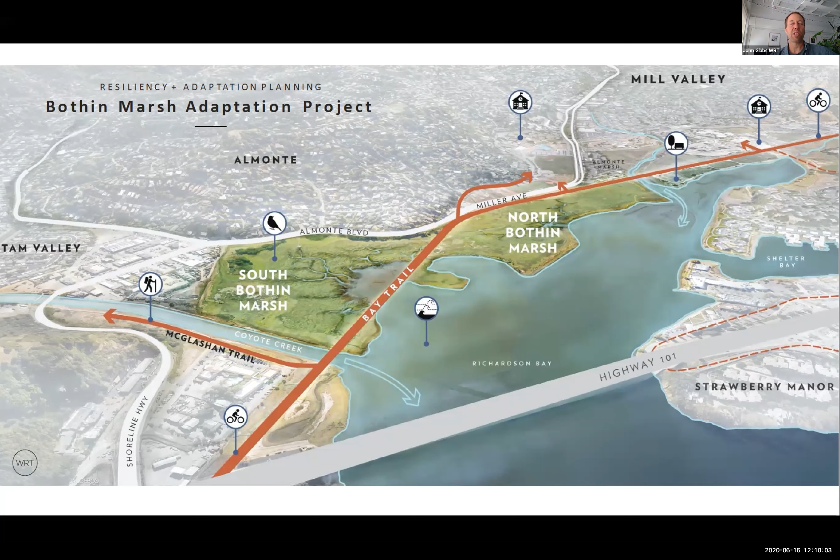So right in there becomes this really important story of how do you save a marsh? How do you understand the co-benefits between this levee as a protection of the marsh related to southern storm wave fetch and the erosive effects of waves into the marsh, but also recognize that the lack of tidal influence in and out of this marsh, the reduced tidal prism, is another effect, a negative effect of the Bay Trail and that existing levee. So looking more specifically at the height of that trail, we see a resilience goal of mid-century, which is mid-century sea level rise plus 100-year storm flood. It's about 5 feet of additional elevation that trail would need to be raised in order to mitigate that effect.

And we're right at the point now in our process, as we're really midway, where we're starting to see some co-benefits. We're starting to see the ideas of a raised embankment of ecotone slope, and looking at the level of investment that it would take to achieve that, both through permitting as well as through the dollars and cents and the cost, and what measure of resilience we would have as we were trying to protect the marsh. But of course, we looked beyond that to end of century, and we see even a 5-foot elevation gain in the height of the trail would still not be resilient to end of century. And so we're also looking at elevated bridge structures.

We're looking at rerouting the trail, and the broader effects of sea level rise as you look out into that time horizon. So really interesting process for where we are today and where we're going to be going. The engagement has been really interesting, and just huge credit to the client group who's done really all the legwork associated with the engagement, the number of tours, the number of students, folks from Marin City, folks from across Marin County that have come out to learn about the ecology of the marsh.

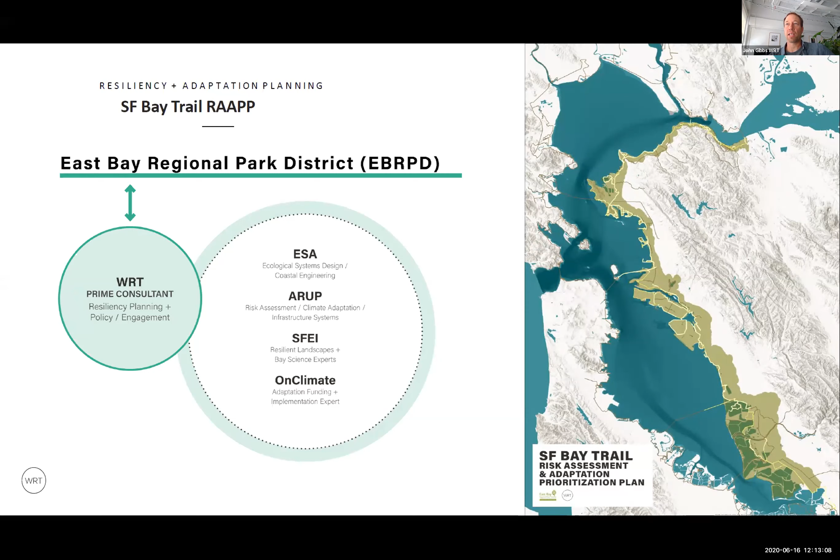So one of the stories about this project is you have over 40 miles of shoreline, you have 2 counties, multiple cities, and a lot of additional miles just of trails along this corridor. So how does East Bay Regional Park District prioritize where it should be directing the greatest resources to protection? And so therein really becomes our project. We have a fixed budget. We've got to cover a lot of territory, and we need to deliver a number of succinct priorities.

So leveraging the OLUs from SFEI, the additional work of adapting to rising tides, leveraging that work becomes really important for being able to move projects along efficiently in our San Francisco Bay Area. And there's a great body of work that is out there. Maybe there'll be a few comments and questions later about some of the gaps in that as we've begun to look at the varied conditions.

So with all that acreage and mileage, how do we really bring this process through in a succinct way? So we began with an analysis of the full shoreline, and I'll click through some of that research very quickly. We then moved into a risk assessment, narrowing down the priority segments to do additional work on, and ultimately developing a list of about 3 specific projects that really represent the highest priority to East Bay Regional Park District. We began with very high-level guidance across all of those trail segments.

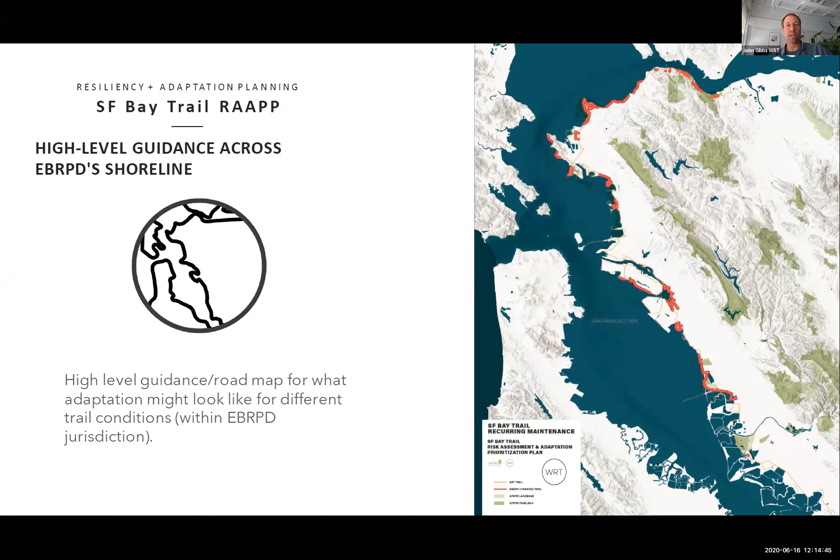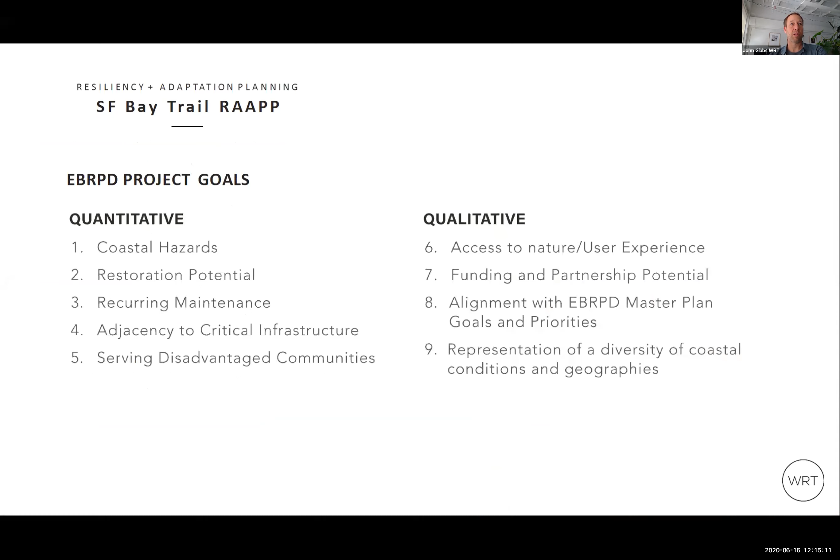We developed a set of goals that were both quantitative and, importantly, were qualitative. We have an incredible brain trust on the team as well as within the client group. So we looked very specifically at hazards and restoration potential. We looked at maintenance. We understood the disadvantaged communities that both rely on the trail for transportation, but also rely on the trail for public access and access to public health benefits of these areas.

We mapped pretty extensively in a number of different ways, and this data set was looking very specifically at both tidal inundation from storm and tides and sea level rise, but also adding the data set from UC Berkeley and others related to groundwater. So mapping this, we began to see impacts to trails, but as you can also imagine, we began to see lots of other impacts all along the East Bay shoreline.

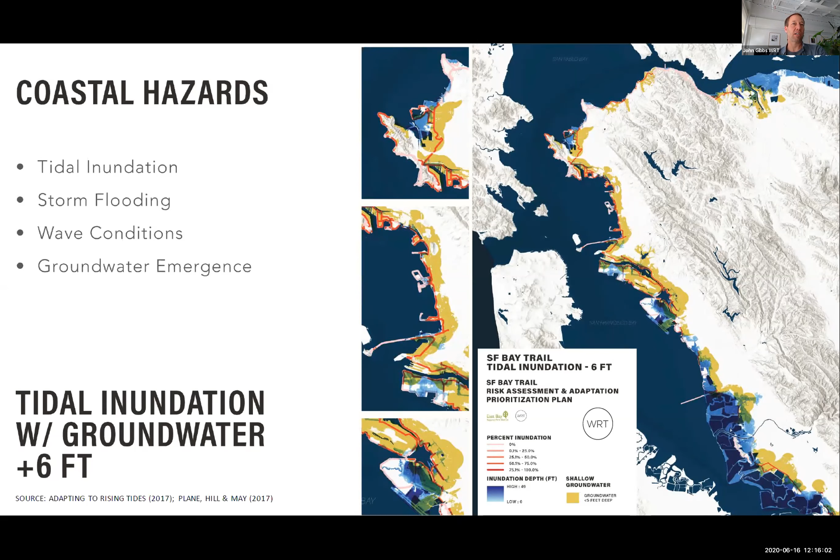And we have a client that is a parks department. And I think that one of the things that this project raises is, you know, there's lots of impacts and it's going to take a lot of different partners. East Bay Regional Park District can't go this alone. And that starts to come out through some of the partnerships and strategies that Alexis Robert has been helping us with as we move into more site-specific projects. We looked at the restoration potential. So we looked at nature-based adaptation strategies in addition to just simply a trail.

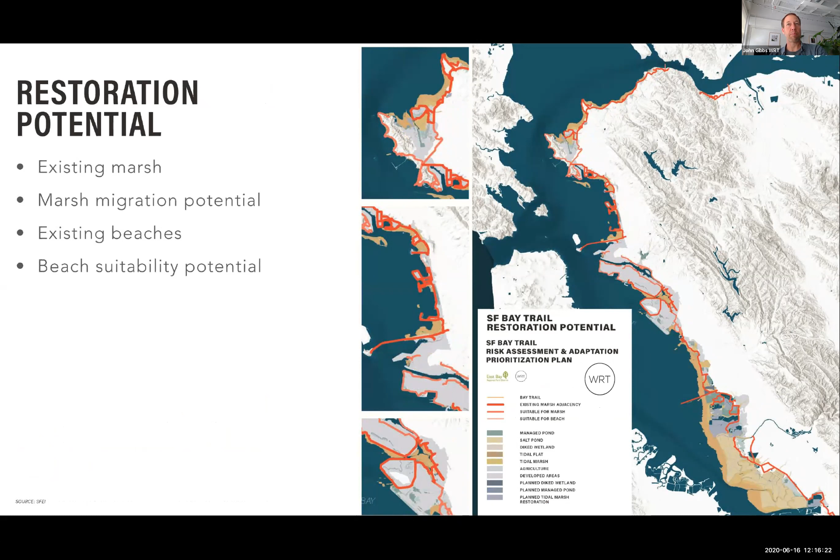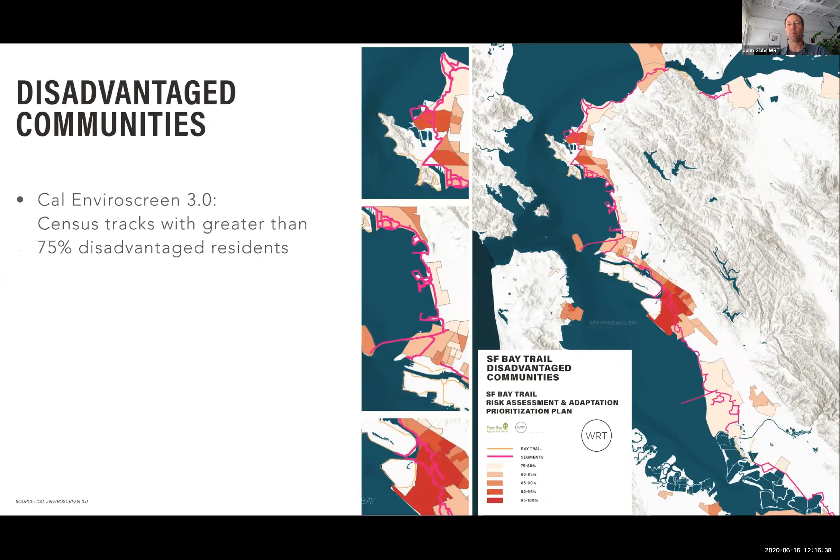We weren't interested simply in armoring and protecting things in place, but looking at where there was adaptive and nature-based solutions. Where do we have ongoing maintenance issues, so very near-term concerns, critical infrastructure. We looked very specifically at disadvantaged communities all along the East Bay shoreline and how that began to weigh in and factor into priority segments of the project.

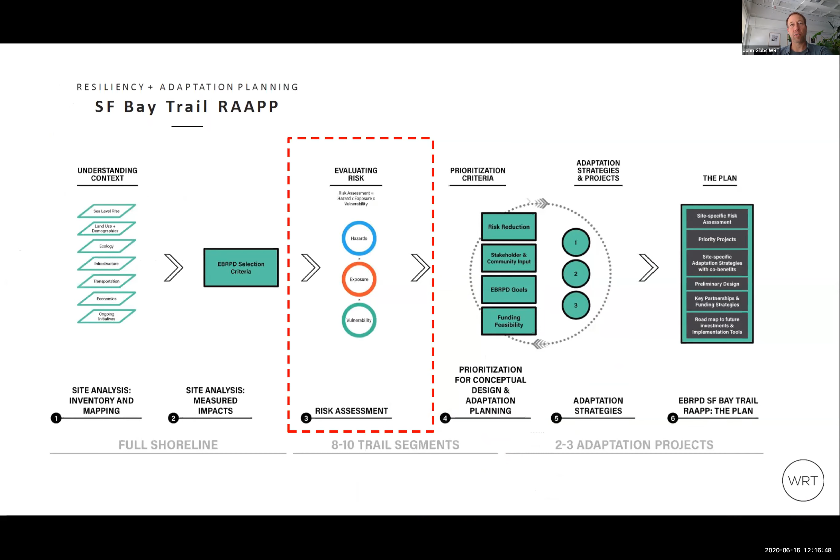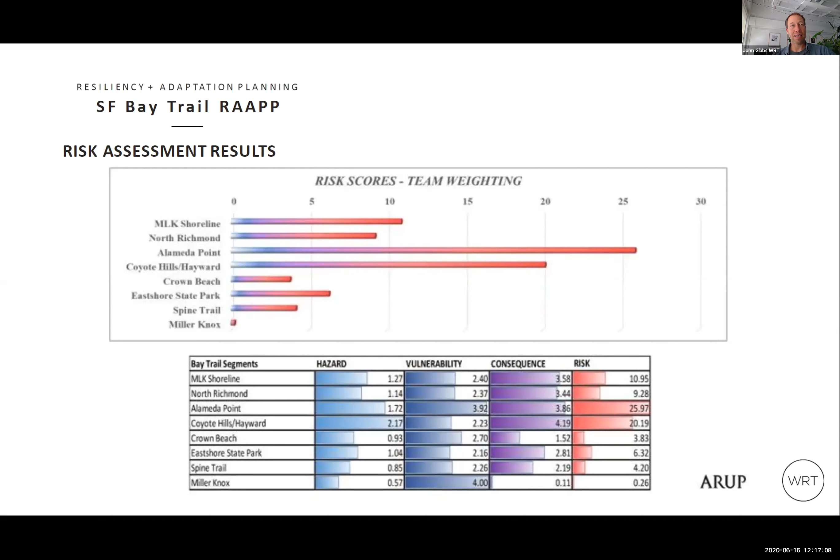Jack Hogan from Arup did just a terrific job with his team looking at the risk assessment, and they led a very specific process on the 8 sites that we had narrowed it down to. They moved through a very technical process looking at a whole series of coefficients related to hazards, vulnerability, consequence, and ultimately a compilation of risk assessment. We took that data forward into a series of priority sites. So the MLK Shoreline, Alameda Point, Coyote Hills, and in Hayward, those were really the top projects.

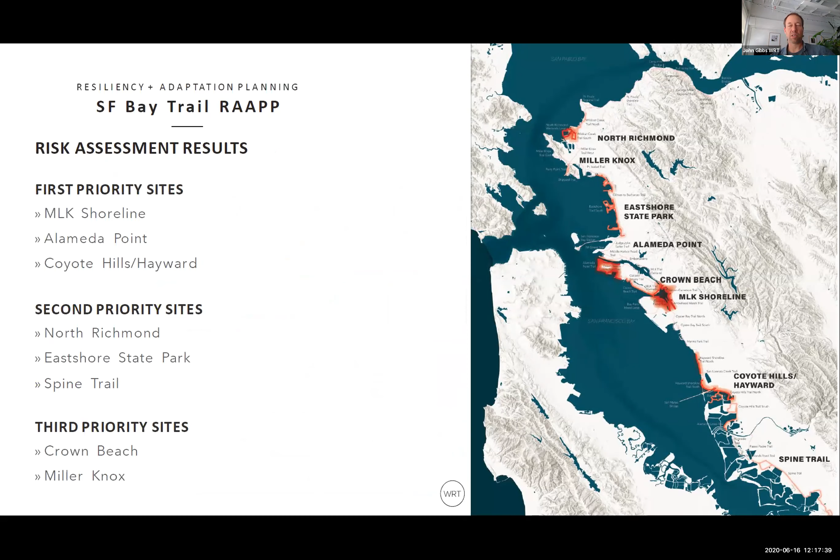Interestingly, Gena is going to be speaking next about the Hayward shoreline. And last week, we heard from friends at Methuen talking about North Richmond. So there's actually a lot of nice overlap and support that this rigorous analysis lends to work that's already been done. Ultimately, we're going to be moving forward with specific concepts for specific sites, and importantly, looking at the partnerships,

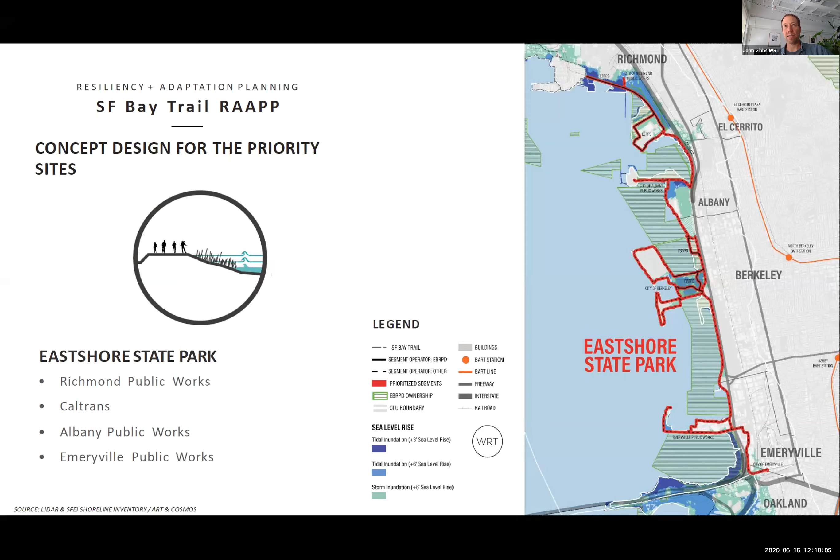because again, this is not about East Bay Regional Park District going it alone, but how do they join forces with the other assets, whether it's Port of Oakland, or the city of Alameda, or in the case of Eastshore State Park, adjacent cities, communities, the state of California, and certainly within the MLK shoreline, we're right adjacent to the airport in addition to the city of Alameda. And that wraps up my summary of those projects, and I want to hand it over to Gena.

Great. Thank you, John. I'm just going to bring up my screen here, so hopefully this transitions seamlessly. Perfect. You guys see full screen? Great. So thanks so much.

That was a really, I think, helpful and very contextualizing presentation, John, and I'm excited to share some related work. I was hoping to share today some of the work that we developed for the Resilient by Design competition and some of the spin-off projects that have really evolved from that.

I also just wanted to share a little bit about SCAPE. I put this nostalgic photo of our office in here to show a little bit of who we are. We're about a 50-person design firm located in New York and New Orleans. We're no longer working in the office. We're working from home, but adapting along with the changing world. And we're composed of a mix of landscape architects, urban designers, planners, and horticulturalists, all working in a very interdisciplinary way to think about climate change impacts on society and landscapes.

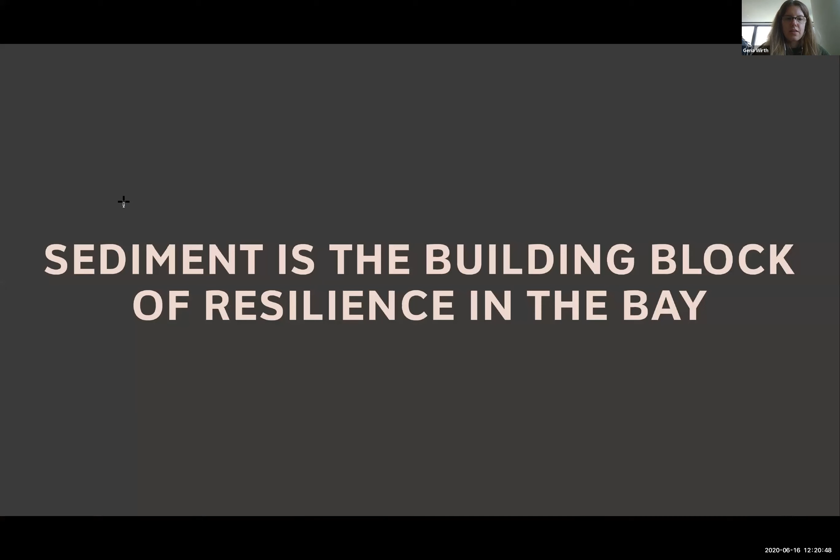And many different scientific practitioners in the Bay Area are really looking at this issue of sediment supply. John, you mentioned it, and I think everyone working in the Bay Area on issues of marsh and tidal wetland restoration understands that sediment supply is one important piece of that equation. And that's really because sediment helps build baylands as sea levels rise.

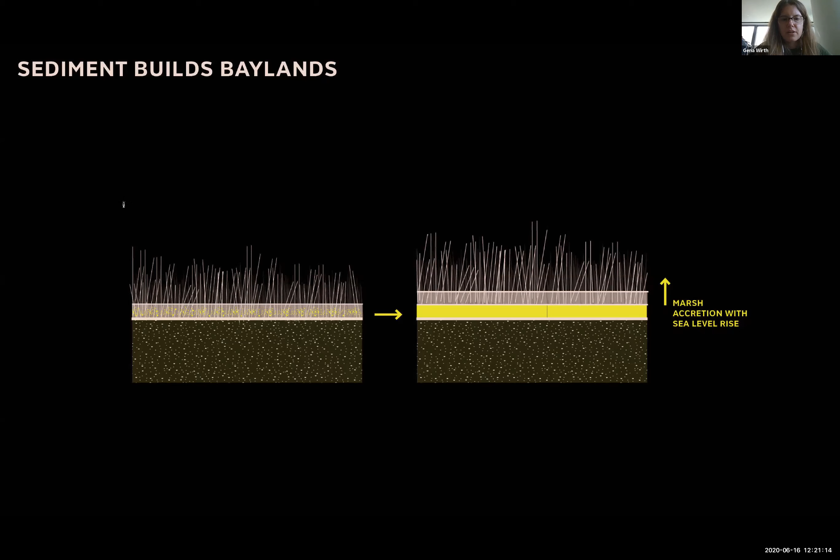Marshes and mudflats and other intertidal ecosystems also need to keep pace with that changing water level so they don't drown or transition to other ecosystem types. And a sediment supply coming in from rivers or streams or tributaries often helps supply that critical sediment to help those marshes grow over time.

Historically, our sediment conditions have really changed from what they once were. Tributaries and the San Joaquin and Sacramento rivers really provided large sediment inputs to the bay. But over time, dams and flood control channels have trapped and contained sediment, basically divorcing the flow of sediment from the flow of water in the Bay Area.

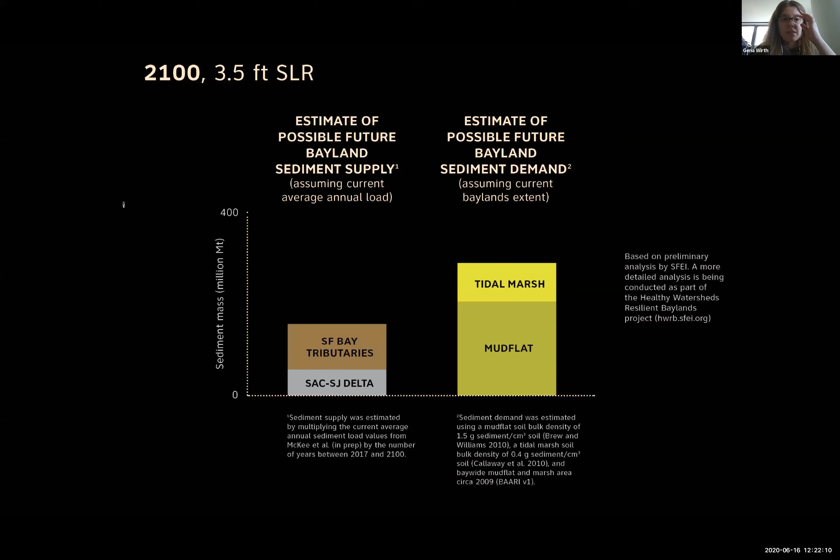Regionally, this is probably an out-of-date graphic because in the last year or so there's been a lot of additional research on this issue, still conveying similar trends: the sediment provided today by the Sacramento and San Joaquin river deltas and local tributaries of the bay does not provide enough sediment to meet the future potential need to maintain even the existing tidal marshes and mudflats the bay has today, using this time frame of a 2100, 3.5 foot sea level rise scenario.

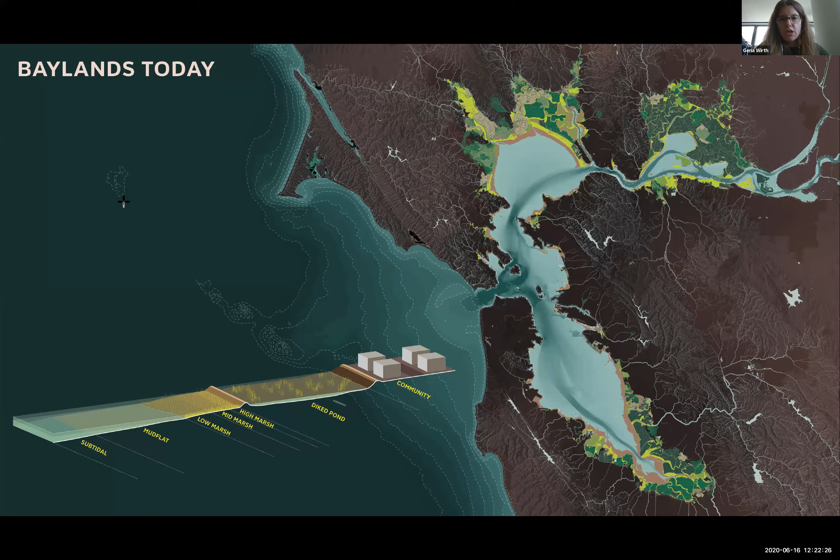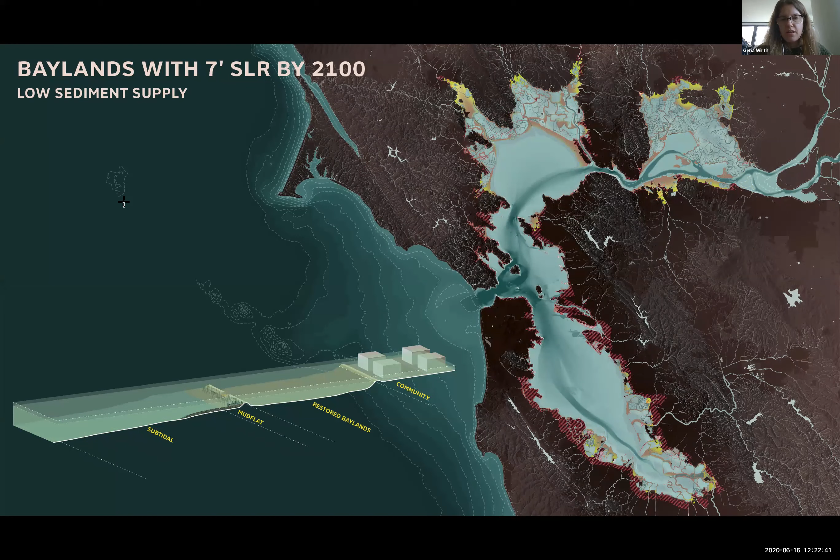Our team tried to use that existing research and build on it, visualizing how this could trigger transformative regional scale bayland ecological and social change. Thinking about this mosaic of ecosystems that lines the bay, and how it might transform into a system predominantly composed of mudflats or subtidal ecosystems and flooded communities over time, with this loss of or transformation in ecological composition caused by sea level rise.

Our team really decided to take sediment as a design challenge, and think about how we can design with mud, but also how to make this issue of sediment management and supply a much more public and debated issue, because sediment is often thought of as a waste product, not necessarily as a life-giving or ecosystem-building material, particularly to members of the general public. So this was one of our project goals.

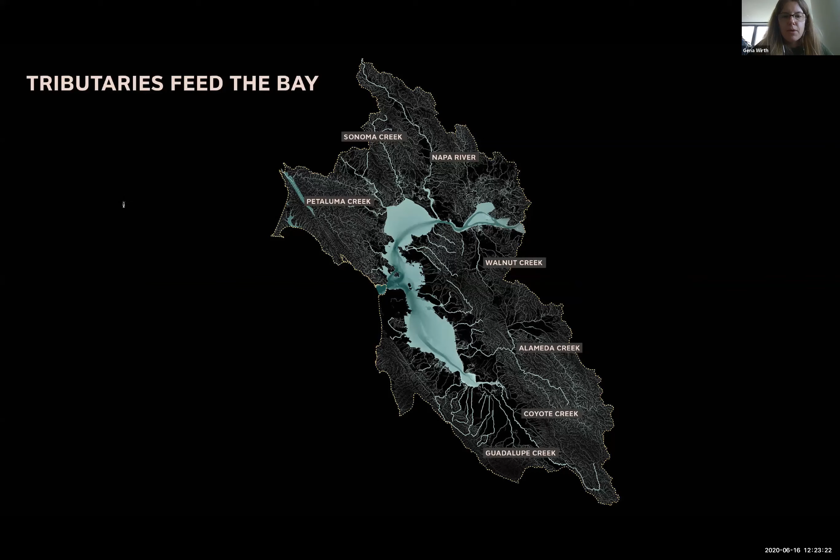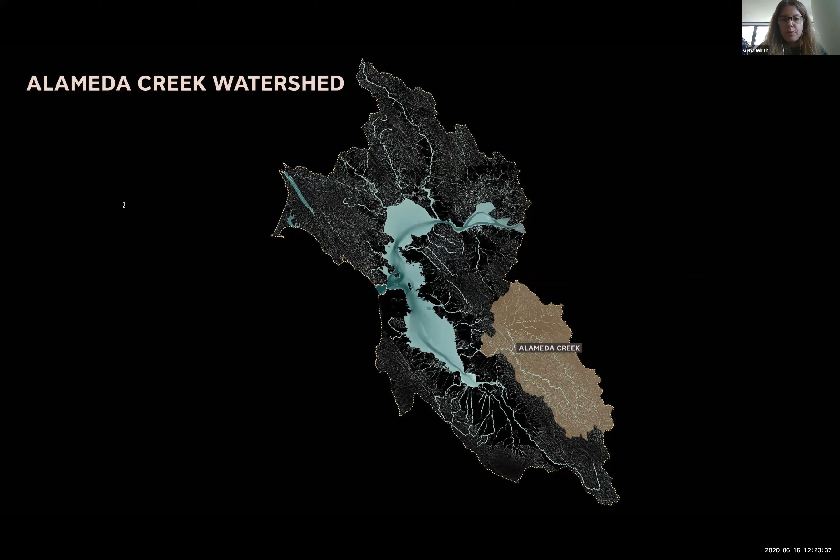Rather than focusing purely on the edge, where many sea level rise and adaptation projects focus because those impacts might be most apparent, we decided to look upstream to the different tributaries that fed the bay, and focus on Alameda Creek, understanding the historical connection between Alameda Creek and its sediment shed and the bay itself, what the connection is today, and what can be done to improve that situation.

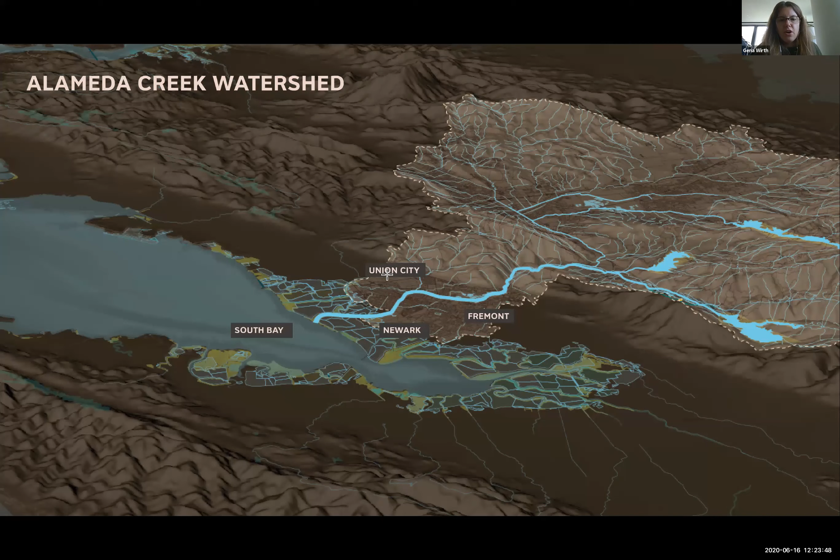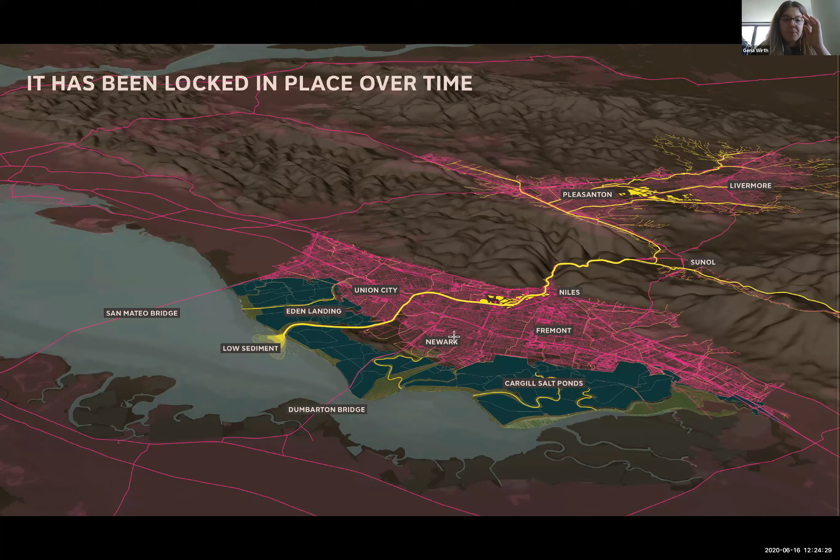The cities of Newark, Union City, Niles Canyon, and Fremont developed at its edges, and the Army Corps developed a flood control channel in that area to manage water. But the sediment conditions dramatically changed, and the marshes left at the urban edge became salt ponds used for industrial salt production. Today, as some of these salt ponds are being abandoned and their uses are transitioning into restoration projects, their vulnerabilities are exacerbated by climate change because they don't have that important sediment supply to keep pace with sea level rise.

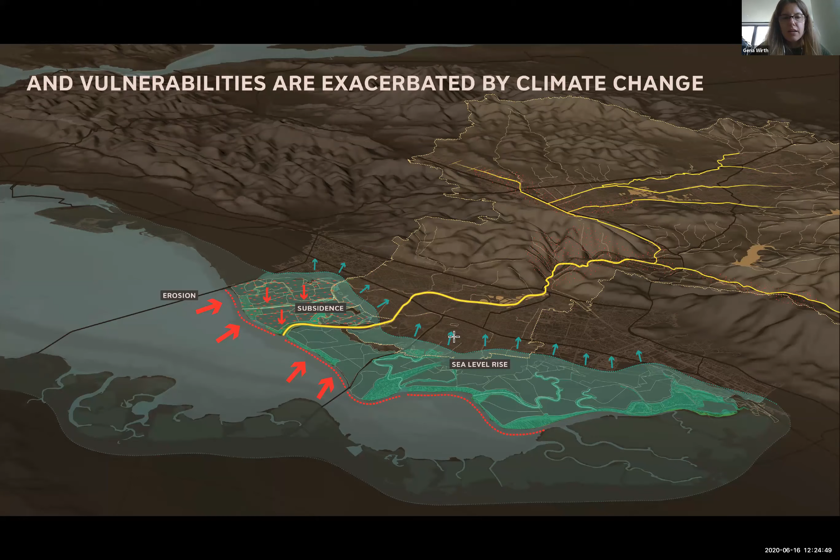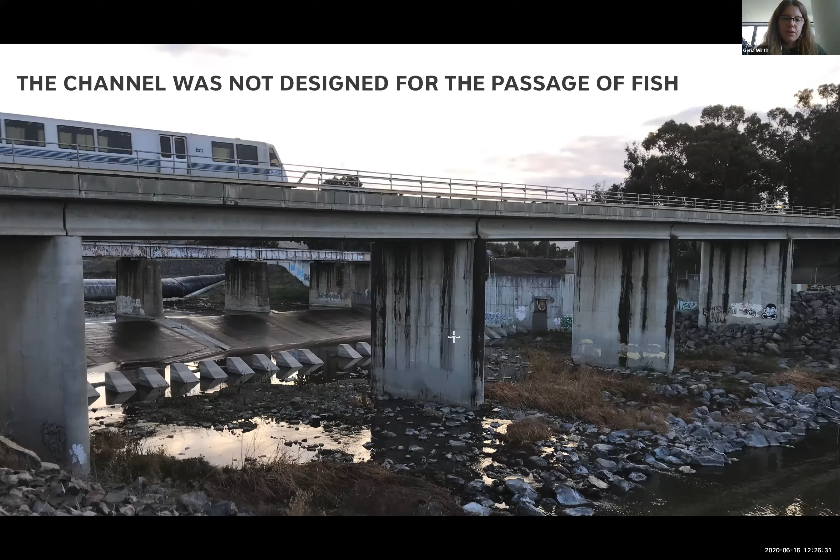It was also not designed to do things that creeks once did quite well, which is to provide migration space and pathways for migratory species like steelhead that were historically prevalent on this creek. You can see this is called the BART Weir—this is where BART moves over the creek, but this weir really prevents fish passage within.

And while the channel does have these incredible recreational pathways at its edge, the bed of the channel and the creek itself was not really designed or allowed to engage people. The conception of people today is that this is not a living ecosystem, but a piece of infrastructure.

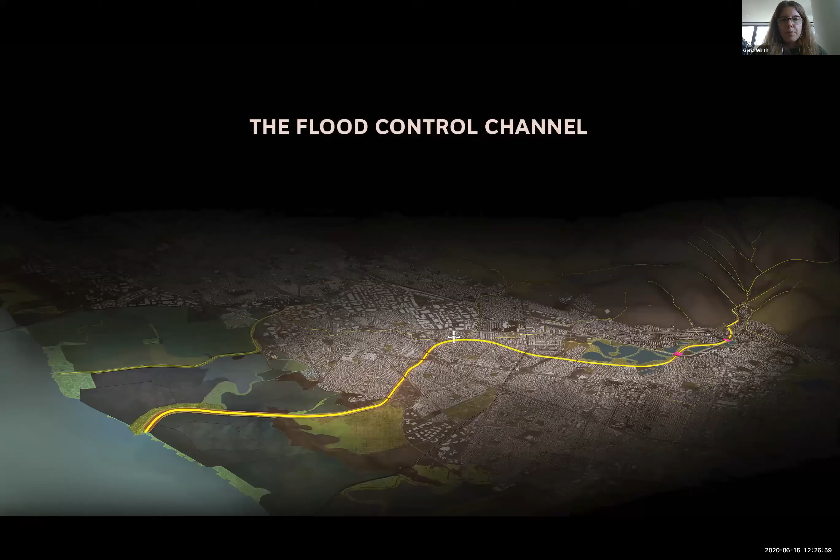Something to stay out and away from, not something to recognize or reflect as a piece of a living system. Our project attempted to address three critical issues: encouraging sediment flows down to the bay to build resilient marshes that could improve ecological connections and reduce the impacts of sea level rise on lowland communities; improving the social relationship between people and the creek to use it more as a resource; and improving migratory passage for fish within the channel and the larger bay system.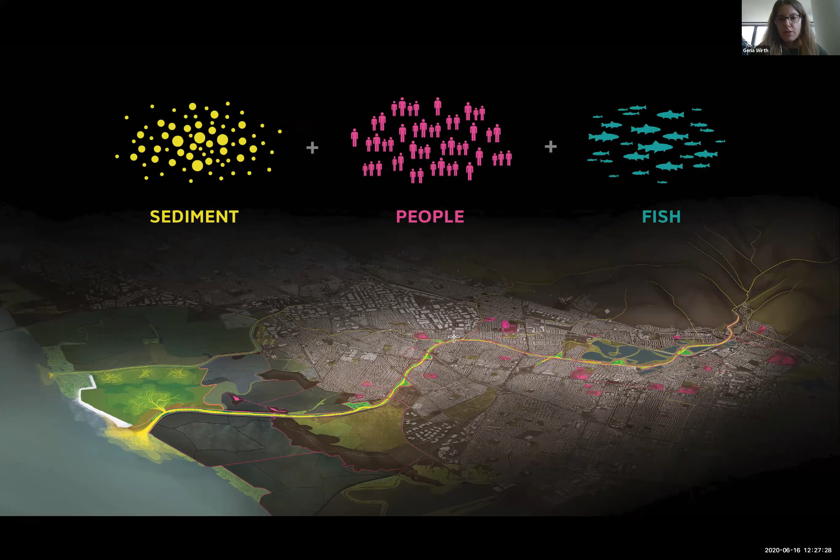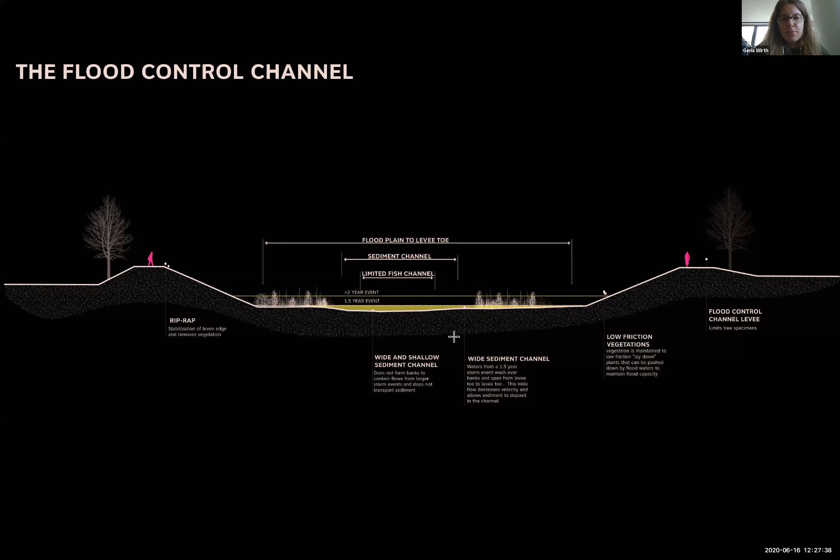So we collaborated with the Flood Control District to brainstorm different ways the channel might be modified and redesigned to enable these three conditions—resculpting the bed of the channel and stabilizing it with different types of vegetation to encourage a bankfull condition that could move more sediment downstream and create a more consistent, sinuous passage for fish migration, particularly steelhead and lamprey within the project area.

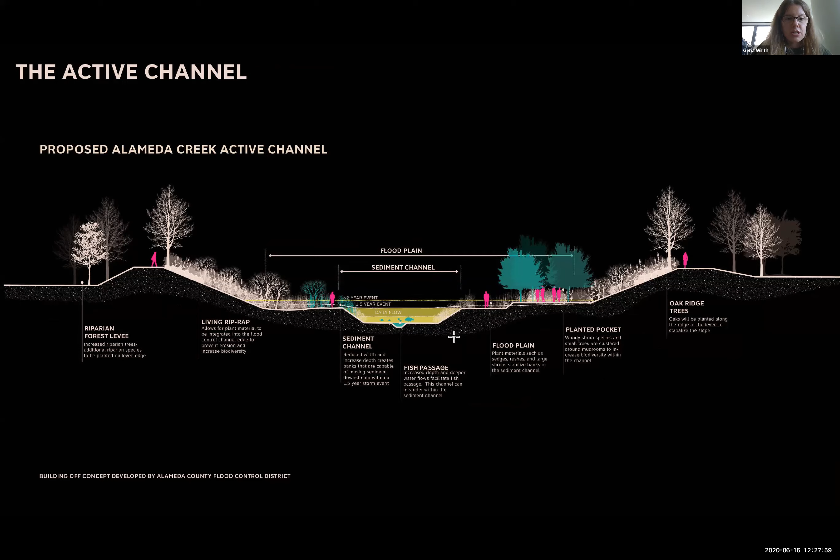These are some of the current, or proposed, clients of the project—migratory fish moving both out of the system from upland reserves of steelhead, but also migrating adults trying to move to their upstream breeding grounds.

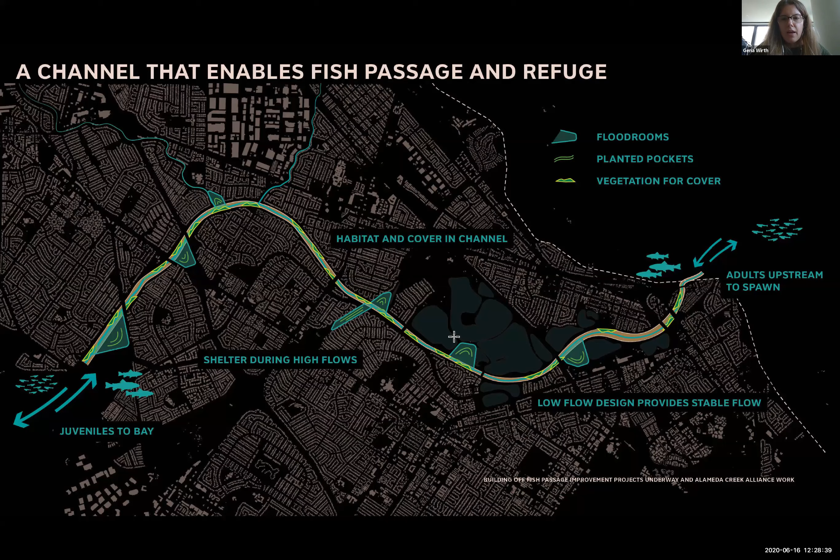So we thought about how to modify the channel in different ways, where possible creating spaces we called flood rooms that would expand the edges of the levee and create space for fish passage and resting spots along the way, also creating more room within the flood control channel and planted pockets and vegetated spaces.

We also noticed from a social perspective that while the creek for some communities was a beloved recreational resource with pathways along its edge, the creek also divided many communities—people often saw the creek as a barrier within their typical routes of passage, a way that neighborhoods got broken up and divided.

So we looked for places where the creek could transform that function and become a connector of different communities. This creek system spans almost 12 miles from the upland areas all the way down to the bay, so it's this incredible potential connective spine between regions.

We saw a lot of potential in that to spur more connections at that larger scale, but also hyper-locally—connecting pathways from schools and libraries to the creek itself, and creating more connections across the creek to really link these different neighborhoods.

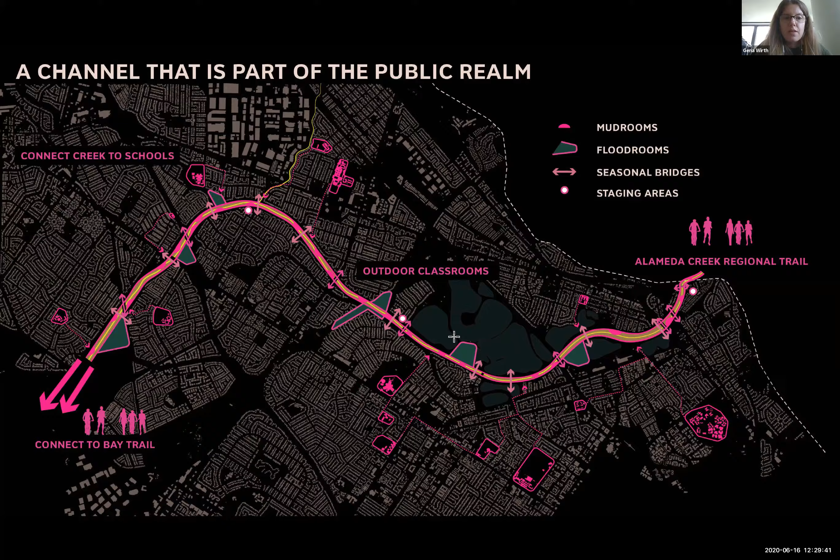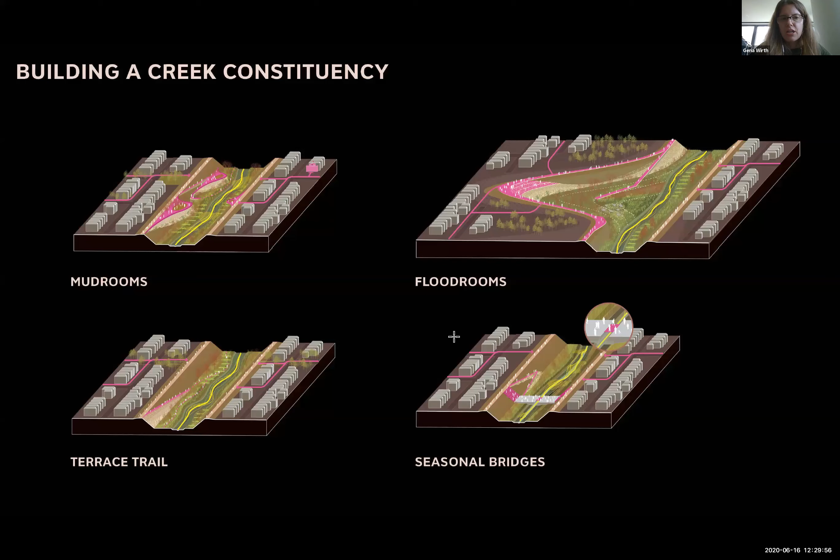We saw this as part of a very important conversation with the public about building a creek constituency, featuring different elements we called mudrooms, flood rooms, terrace trails, and seasonal bridges, each one with an outdoor gathering and education perspective that reflected the needs of the community around it.

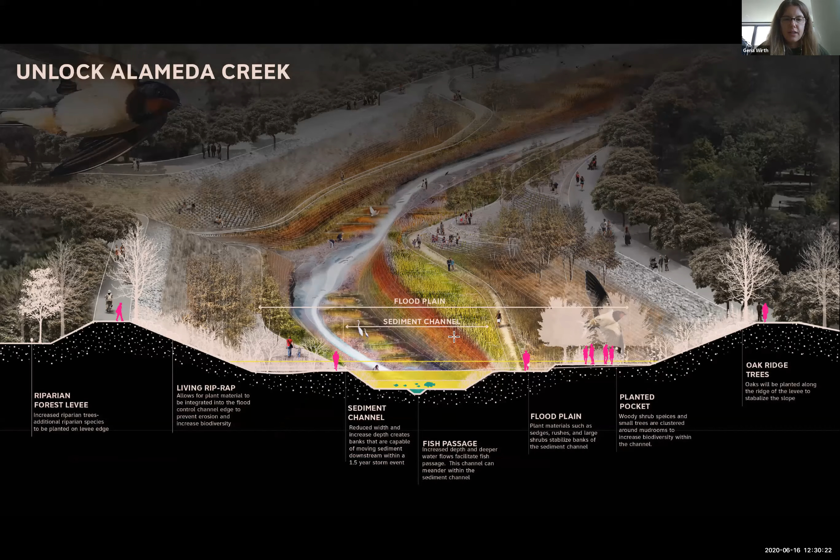This work is synthesized in this larger scale rendering and drawing we called Unlock Alameda Creek, which is about making more acupunctural changes to the composition of the flood control channel itself for improved flows of sediment, improved migration of fish, and improved social connectivity. These are just a couple zooms on that area.

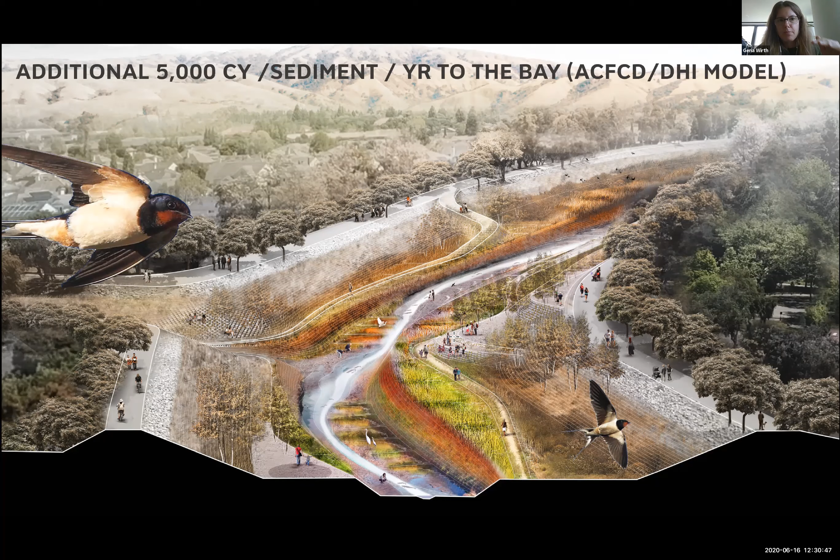Stepping back, we also built upon modeling that the Flood Control District had done to understand this type of intervention could help move an additional 5,000 cubic yards of sediment every year to the bay, which could be a very important source for that long-term slow nourishment of annual sediment coming to the bay, helping these marshes—especially the marshes down at Eden Landing, this area here on my screen—keep pace with sea level rise.

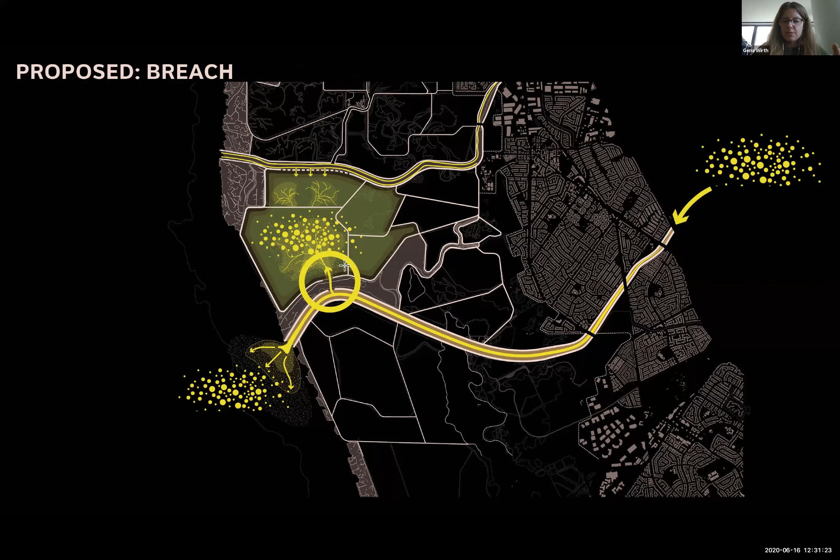So down at the marsh's edge, the existing flood control channel doesn't really feed Eden Landing today with sediment. It has levees all along its edge, all the way out to the edge of the bay. Our proposal was to work with the many different partners working on this large scale restoration project at Eden Landing, the State Coastal Conservancy, in collaboration with many others, including the Flood Control District, to propose this breach to the Army Corps infrastructure.

This looks like a very simple move, but is in reality a very complicated and hotly debated type of infrastructure change. It involves a lot of different Army Corps permits and transformation of regulations and maintenance guidelines set to maintain and operate the channel, which everyone is contractually beholden to.

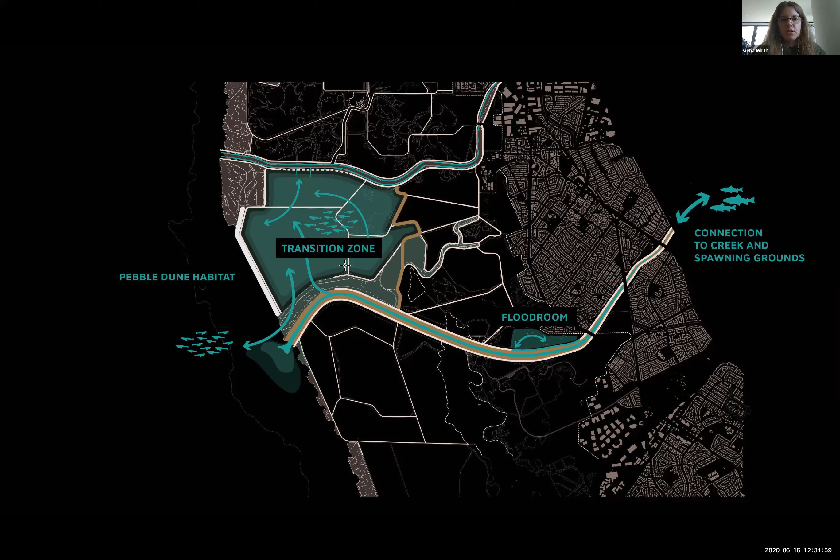It's a very complex conversation, but it would have enormous ecological benefit and really create this transition zone for migratory fish species using this space to transition from the saltier waters of the bay to the fresh waters of the creek. We also think it could be nicely nested into a recreational framework, creating a series of pathways, overlooks, and educational moments to get people out to the bay to experience these vast and large scale ecosystems.

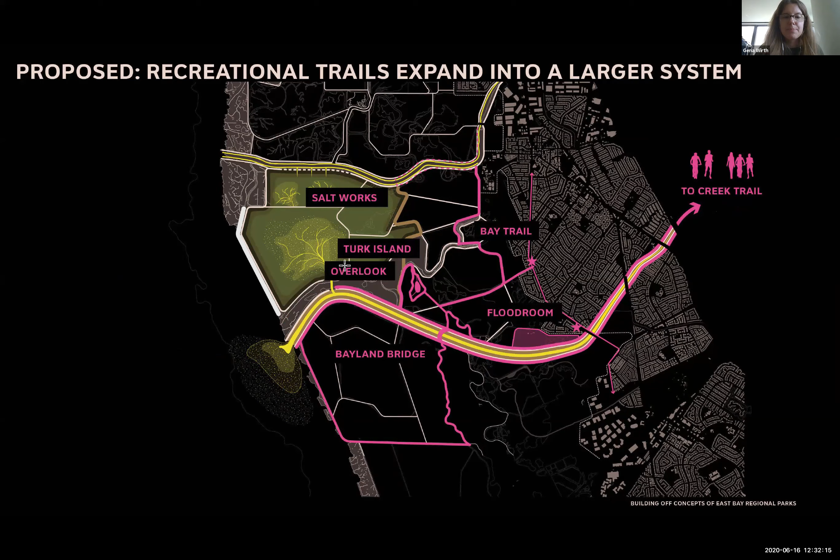So this represents the full thinking around the project, that interventions far upstream could have a positive, resilient benefit for restoration projects and marshes, these important cushions for the bay edge downstream.

One of the pieces of the project that we ultimately developed into a project we're advancing now with the State Coastal Conservancy is shown in the foreground here. This is the perimeter levee, and we've called this the Eden Beach Pilot, this gravel beach and berm. This is related to thinking about how we can design more naturalized shorelines, even where we have highly urban, highly modified, highly built environments.

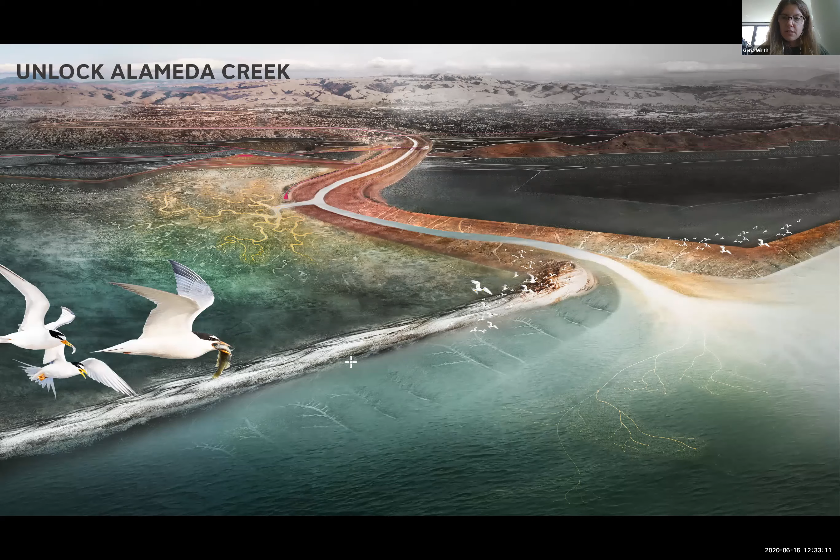So this perimeter levee in the foreground, we're showing here redesigned as a more naturalized coarse grain and gravel beach system that would be a little bit more dynamic. Today, this system is a riprap perimeter levee. Our pilot project is thinking about this in tandem with many important partners, including the California Department of Fish and Wildlife, who really own and operate the property.

The project is really thinking about how we can move away from relying purely on riprap and think about more naturalized constructed shoreline conditions that might foster shorebird habitat and other bay ecological life, as well as provide those layers of erosion protection and risk reduction.

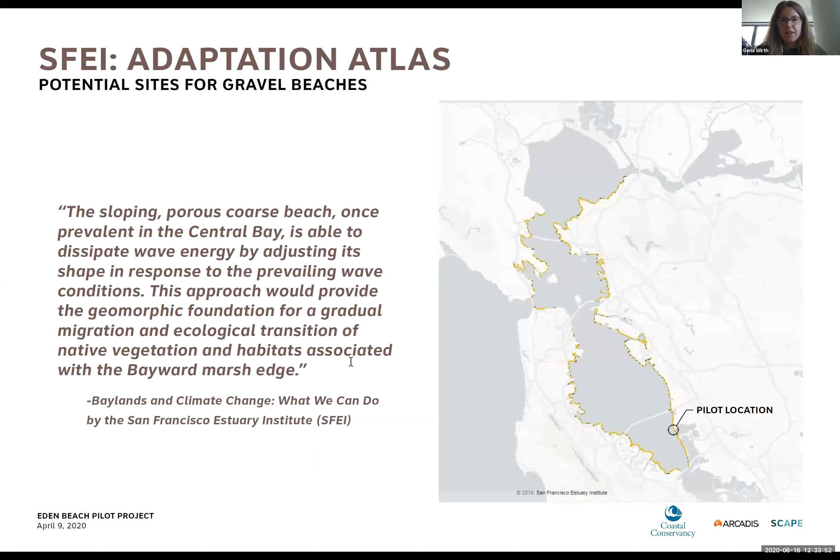This work builds on some of the work done by SFEI with the Adaptation Atlas, which identifies this site as a potential site for gravel beaches. We've been working on this very small scale pilot as a proof of concept of this larger strategy that could be applied to the entire perimeter levee in tandem with the Eden Landing Phase 2 restoration. That is the hope and the goal.

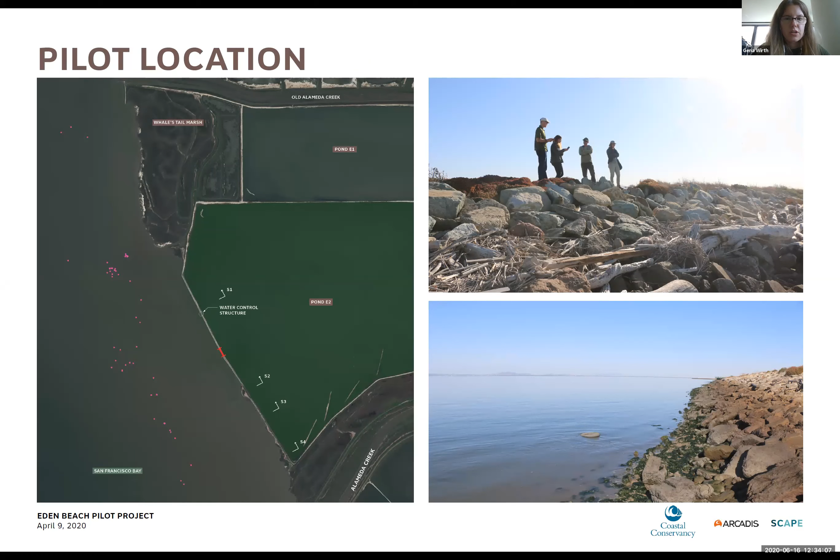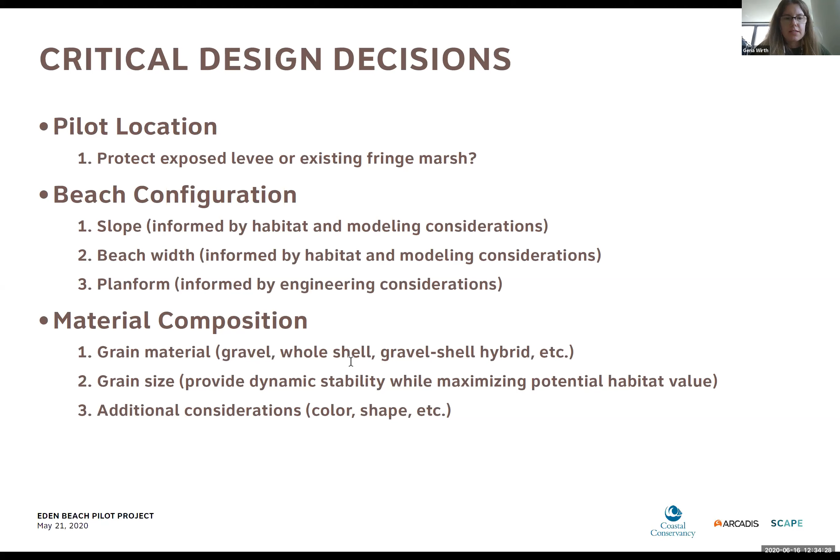I can talk more about this in the Q&A. I think it's very fine grained—no pun intended—we're looking at a wide variety of grain sizes and material types for this pilot, but it's basically meant to look at a constructed gravel beach system as a replacement for and a supplement to the existing riprap. We're testing two different beach widths and material compositions to understand how they perform both from an erosion control perspective and a habitat perspective.

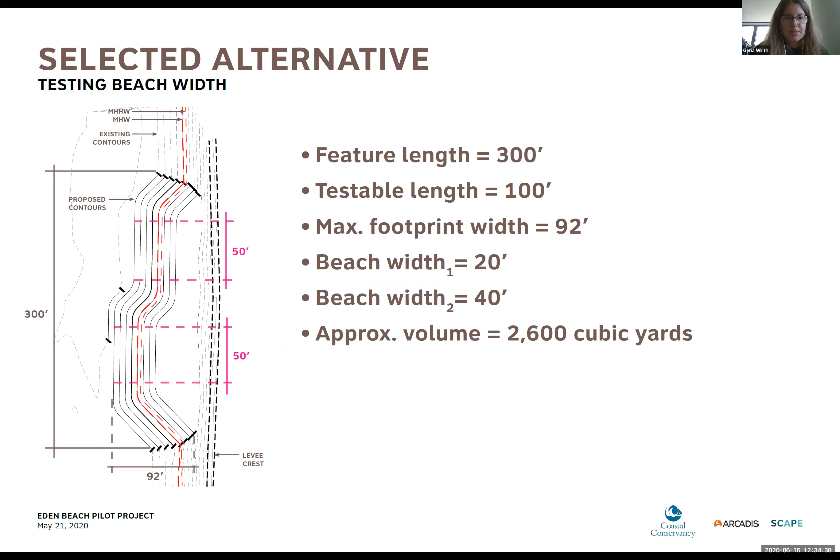I'll end there because hopefully it talks about the large scale aspirations of the overall project and proposal of redesigning sediment flows from upstream to downstream, but also some of the very localized considerations and tests that need to happen to be fully prepared for adapting to climate change.

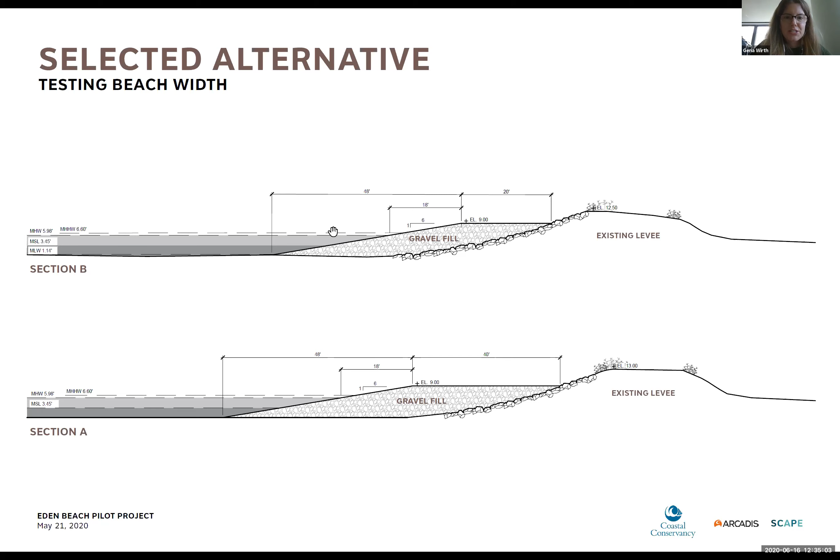So I'm going to talk a little bit about the Colma Creek project, which is an extension of the work that we did within Resilient by Design. I'm going to talk about Colma Creek itself, but I'm probably going to talk more generally about our design process and this idea of creating an adaptation toolkit that deals with some of the challenges that many creeks around the bay share, and an attempt to develop design content that might be of value to other communities around the bay. So this is Colma Creek in South San Francisco.

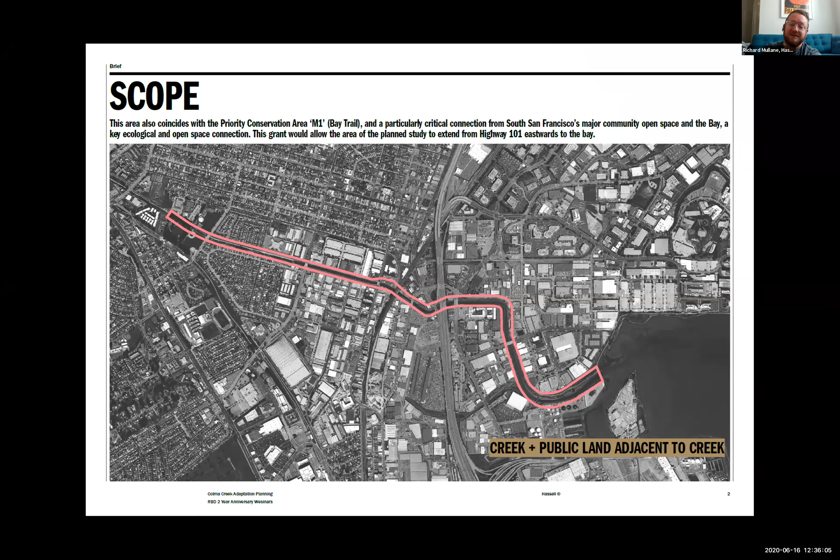You hopefully remember it from our Resilient by Design proposal. We are now looking at a more constrained design scope for a different purpose here, so we're just looking at the creek and the public land adjacent to it. Our grand vision served a purpose as part of RBD, to set people's sights further into the future, but it wasn't all that easily implemented by the local city. So the city of South San Francisco asked us, with continuing work, what are the first steps we can take to start implementing change along this creek?

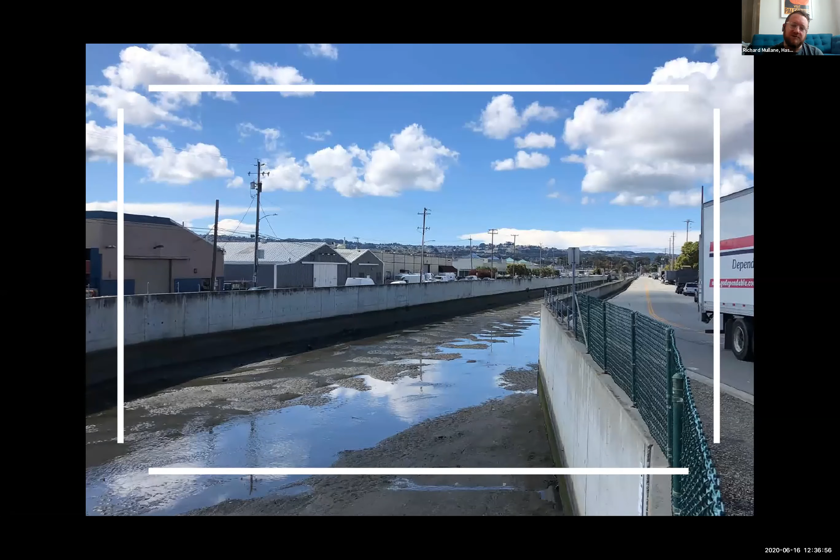It's pretty clear that there's lots of things that can be done along Colma Creek in terms of adaptation. This project was funded by an SB1 grant, and on top of that, also a priority conservation areas grant. The objectives of those grants were aligned, but also slightly different.

The three objectives we're looking to address within the project are managing flooding and sea level rise impacts and adapting the creek for that purpose, then looking to restore natural and native ecologies along the creek, but also public access.

Colma Creek as a corridor, we identified it as a key link between the community and the shoreline that had been severed by a number of major pieces of infrastructure over time. Not surprisingly, we weren't the first ones to have that idea—Plan Bay Area also identified this corridor as a key link to the Bay Trail. So that's largely where this project's funding is coming from.

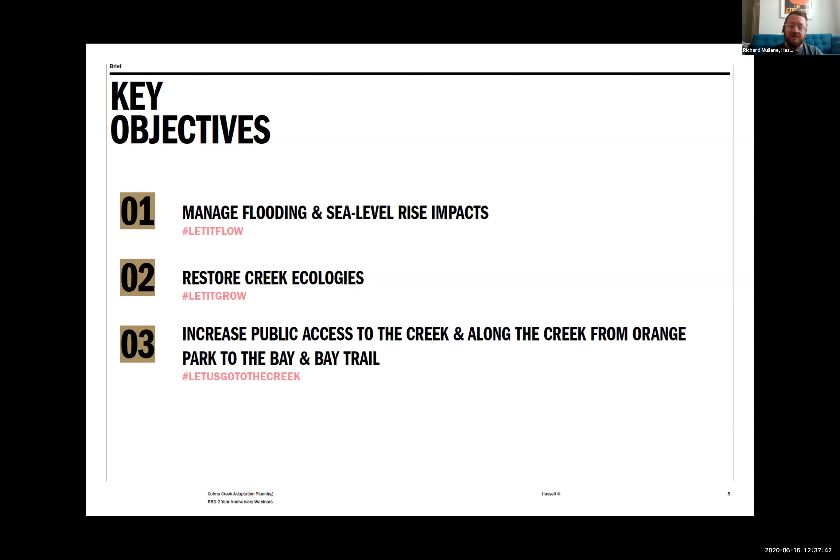This was a concept within Resilient by Design that started us looking at Colma Creek, and that became the motivator for developing a regional toolkit. It's about the number of creeks around the bay and the opportunity for those creeks to connect communities back to the shoreline, and to be the first steps in adapting to rising sea levels, overcoming barriers like freeways and rail corridors that have created this circular connection around the cities of the bay and severed direct access to the waterfront.

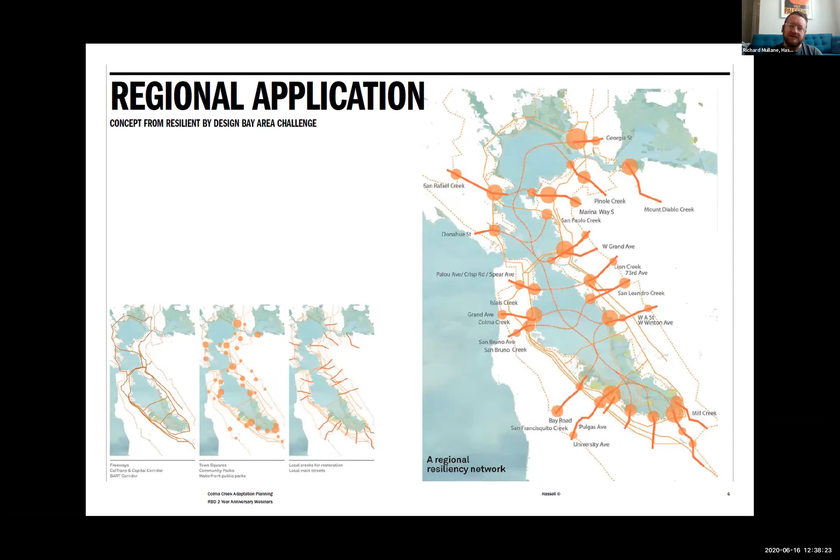The way we started the project is by bringing together our working group around a set of principles, explaining our ideal approach to design across different categories. So those three objectives translate into a set of principles in terms of water, ecology, and access. We've adopted the hashtag Let It Flow because we find it catchy and everybody likes Frozen. We look for opportunities across these objectives that either align or conflict, so we can start that discussion early within the project.

In terms of water, we're looking at ways we can increase the capacity of the canal through the shape we create, but also how that might open up better visual access to the water. The canal's designed at the moment around a worst-case scenario, so we're looking for ways to design it for different levels of inundation that happen daily, annually, or every 10 or 100 years. We're also looking to gradually move from this concrete canal into a naturalized creek, understanding there's going to be some hybrid grey-green solutions along the way.

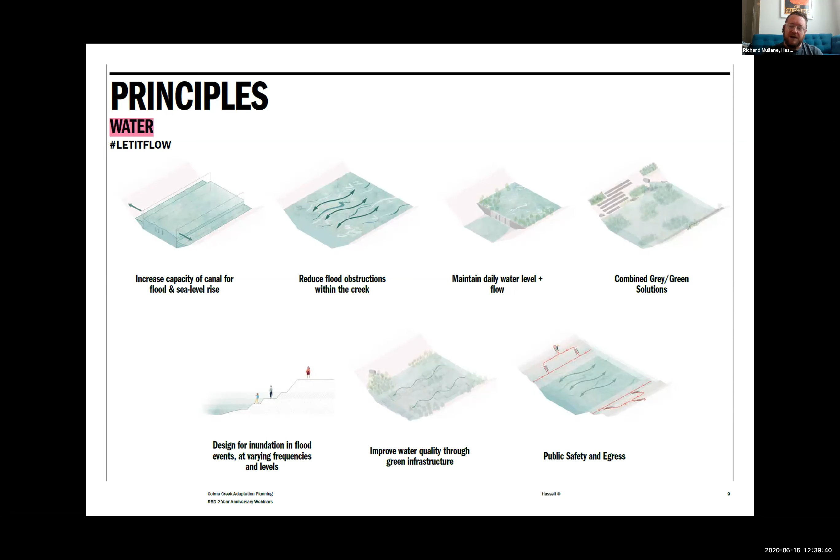In terms of ecology, we really think there's an opportunity with this project, and with all these creek projects, to allow people access to nature. That's a key element in this city with a lack of open space. But we're also importantly trying to design connected nature along this corridor. When we talk about sea level rise and creeks, there's a need for transitioning zones of habitat as fresh, brackish, and saltwater zones shift over time along the creek. With all of that considered, we also want lo-fi solutions so the community can be involved in planting and participating in the restoration and stewardship of the project.

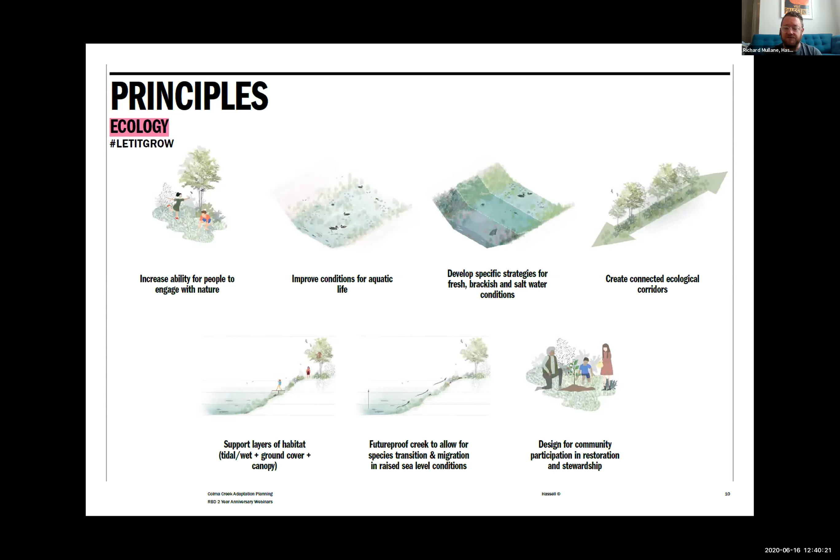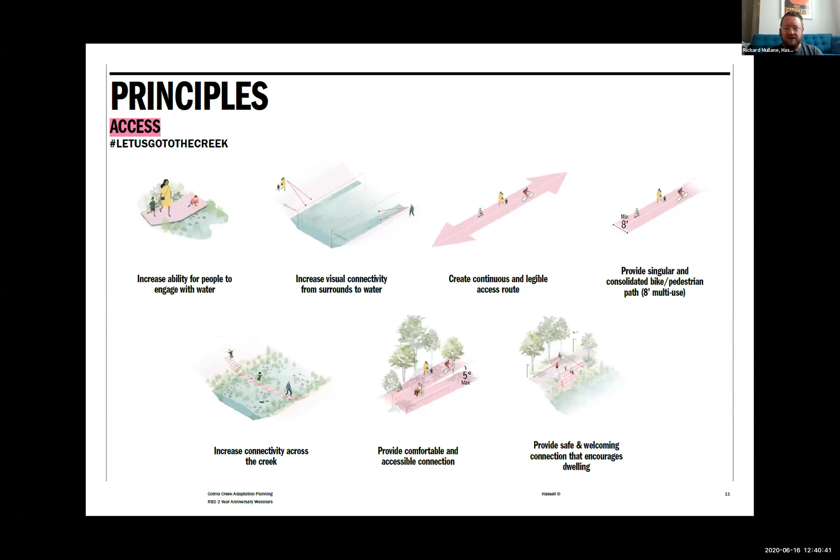And then finally, in terms of access, it's really about getting people access to the water, but also getting them access along the creek corridor to the shoreline. There's a number of constraints around how to make that access equitable across the community and how to make it safe, but there's also lots of opportunity within the corridor to do this in different ways.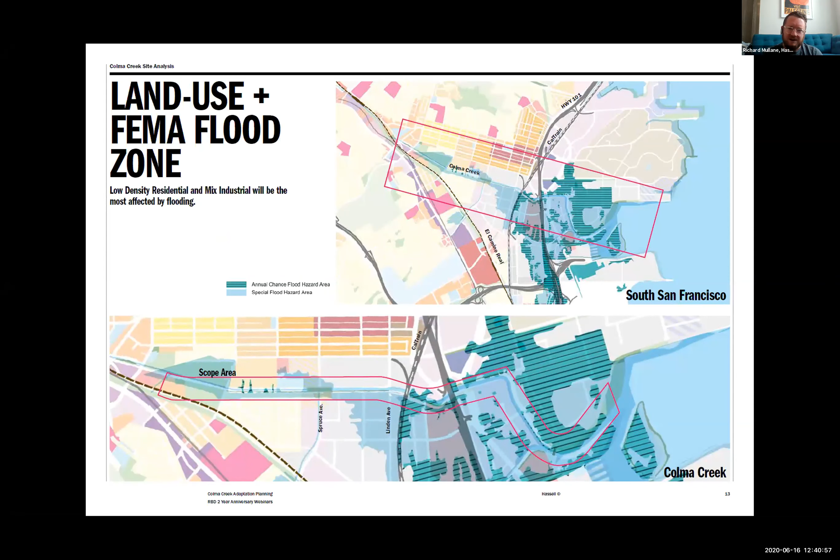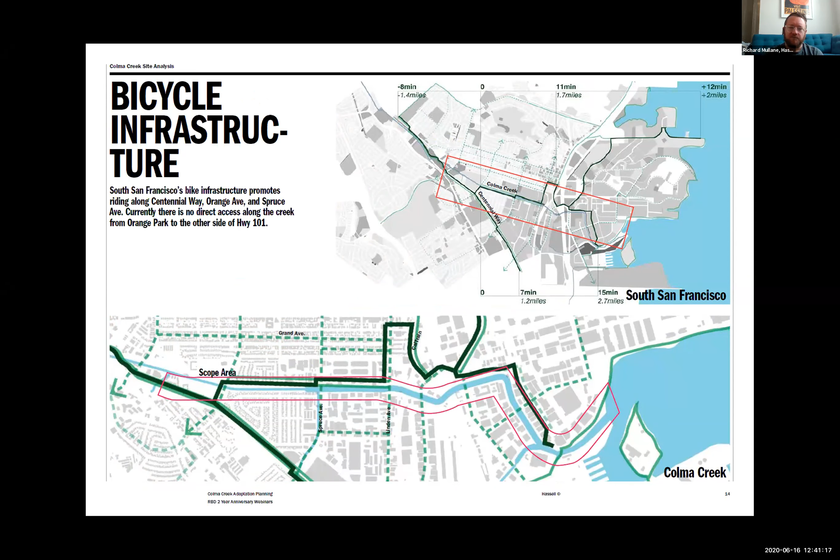Looking across our site, I just want to highlight a couple of key maps that drove the project: the FEMA flood zone that exists along the creek, and also the access piece. Clearly there's an opportunity that if we can solve flooding challenges along the creek, we may be able to deliver more direct access than the city's current bike plan, which takes people a long distance from the creek to move to the shoreline.

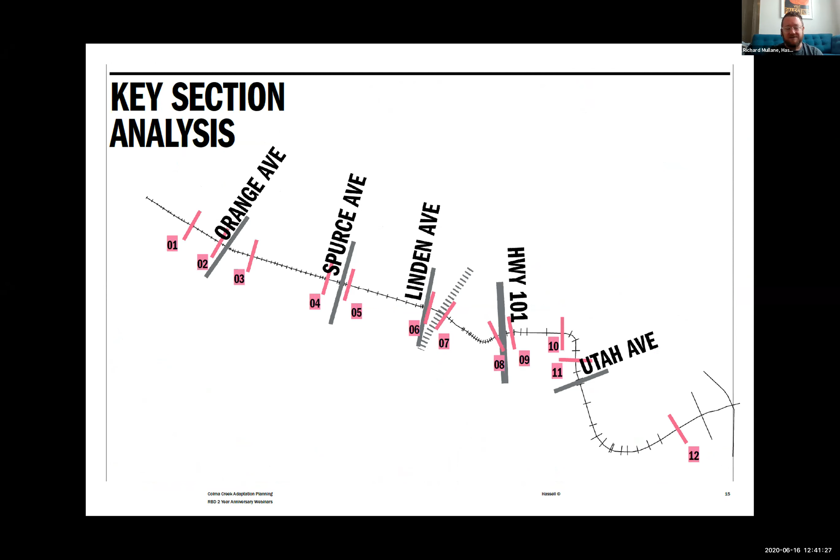We started the project in South San Francisco at this stage by looking at the different sections that happen along the creek. There's a whole range of different conditions, but we looked at 12 typical sections showing the creek width changing from 40 feet, and changing shape and depth all the way down to close to 180 feet at the shoreline.

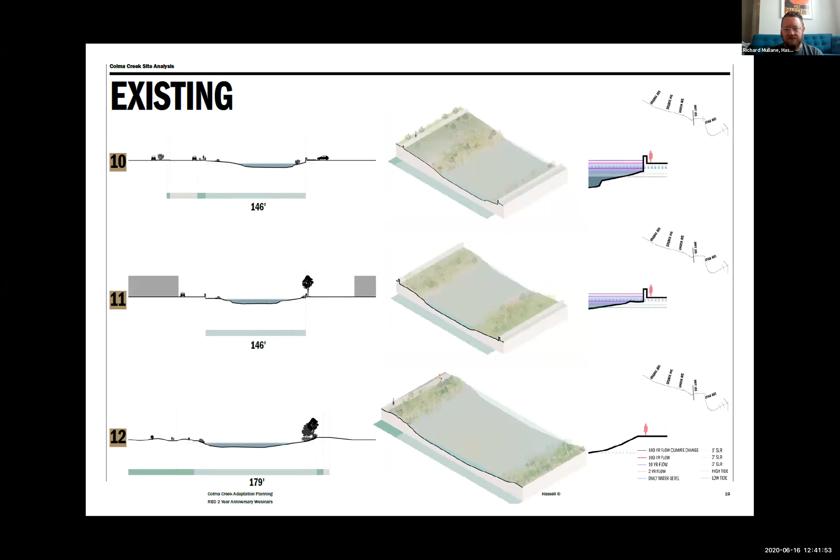Within each of these sections, we also looked at the various flood levels, whether it's a daily water level in the tidal change zone, a 10-year flood, a 100-year flood, or even 1, 2, and 3 feet of sea level rise.

What we were able to do is define different character zones along the creek, and we think these are typical of a number of different situations that occur along all creeks around the Bay Area. So whether that be when a creek runs through a park with more opportunities for programming to engage with the creek, or where there's a street or linear park running parallel to the creek that offers opportunities for adaptation, all the way through to these tangled intersections of the Caltrain corridor and 101, with the constraints around getting over and under those barriers, and down to the bay where we address sea level rise risks in a completely different profile to what we start with upstream in the park.

So our approach has been to build a toolkit, which is a tricky thing because we want to create a wide variety of options for people to apply to different scenarios, but we also want to very clearly explain what the pros and cons are of doing different things in different situations.

It's a really expansive design process, and there's all sorts of testing of how we can add to and subtract from the existing creek, and how that relates to the naturalization and restoration effort, and also how that relates to the distance that people are from the water, or from nature, in those restored sections.

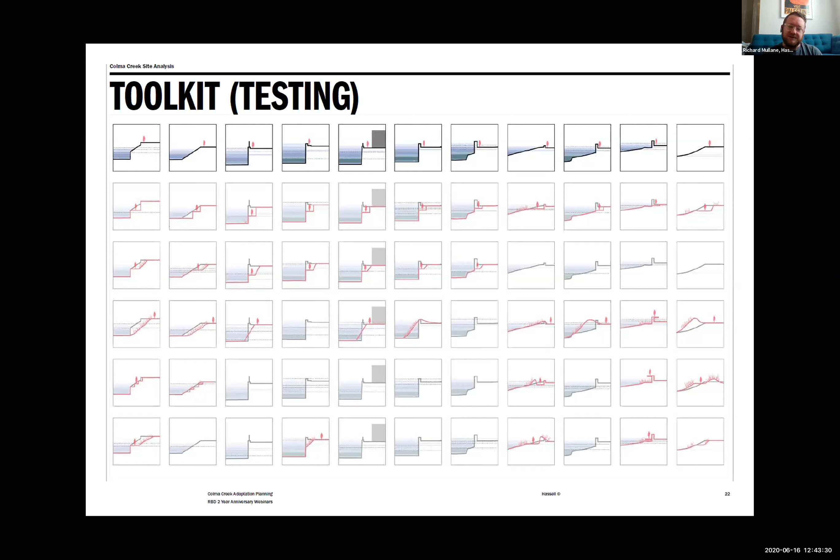We distill all of that into this piece of work that's almost finished. This is in draft format that I'm sharing with you guys, but basically a suite of adaptation options defined by those different character zones, each assessed against the principles I mentioned earlier, but really assessed against the 3 high-level objectives of ecology, water, and access or connectivity.

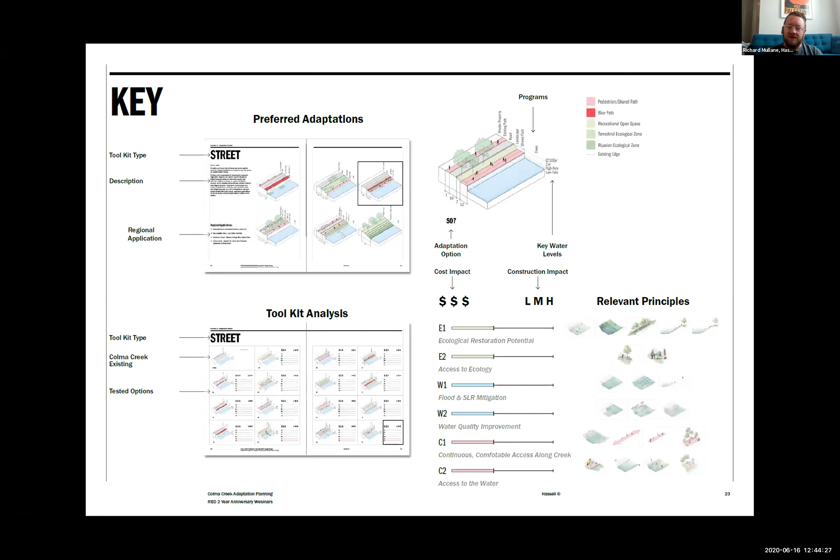It's a pretty expansive document, but we're also looking to acknowledge that sometimes adaptation may be taking some low-hanging fruit and looking for low-cost, high-impact solutions. Other times it's important that we set a long-term goal and say we have to completely remove a street in order to expand a creek in an area of particular flood risk or in need of restoration.

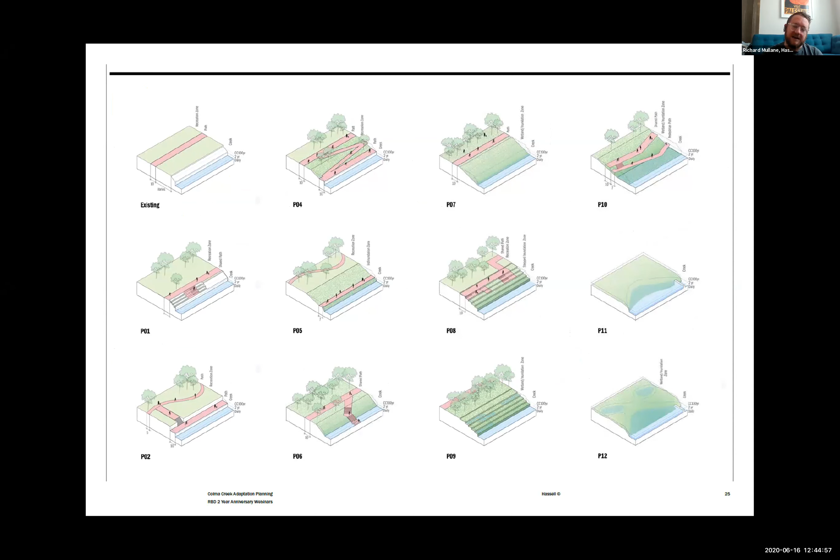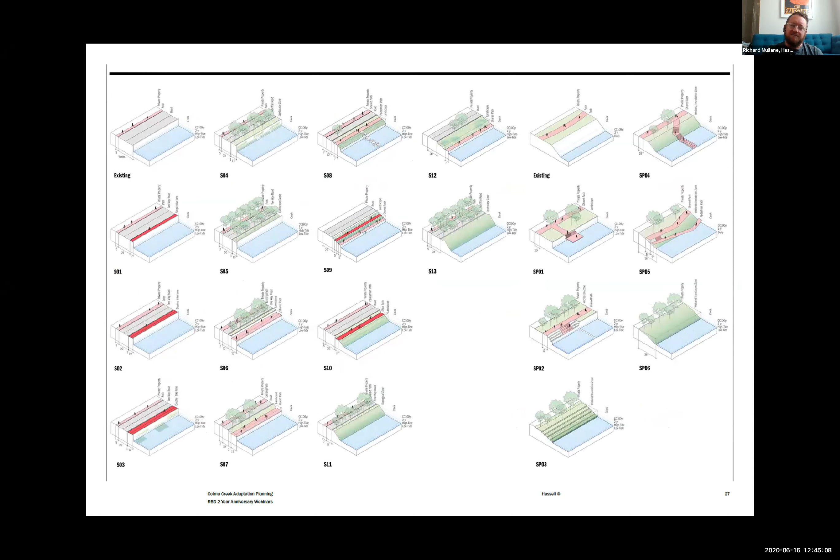I'll quickly skip through some of these areas because we could talk about all sorts of different options. What we're looking to do is mix different types of access, whether that be inundatable areas within the flood zone that might go underwater every year or every 10 years, also changing the conditions of the edge in terms of treating stormwater running into the canal, layering that, and also retention built into the side of the creek. In terms of access, we're playing with how we can get an accessible multi-use path to continually connect between each of these settings.

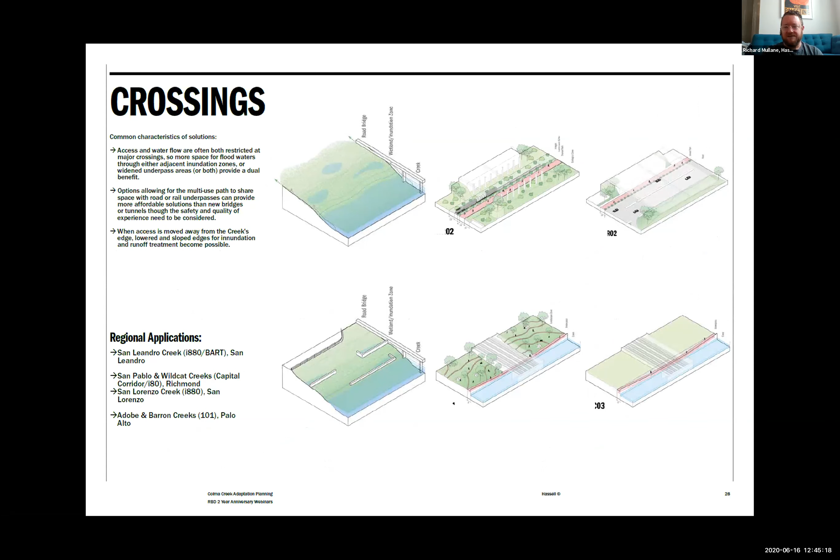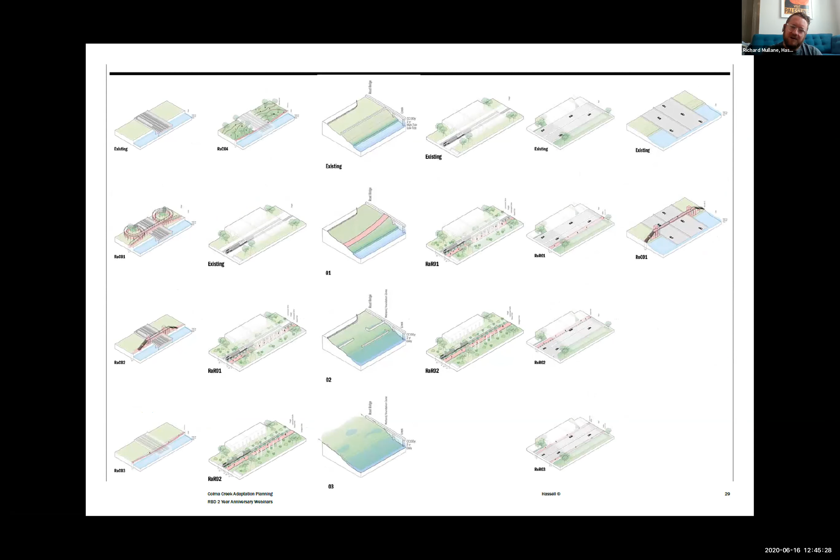That includes sometimes having to move onto street-side paths as we go under or around 101, and also converting freight line into an accessible trail in order to take advantage of connecting under 101, all the way down to the shoreline, where we're looking at future sea level rise scenarios and the need for migrating marshlands, as well as potentially detention of stormwater separate from protection from sea level rise.

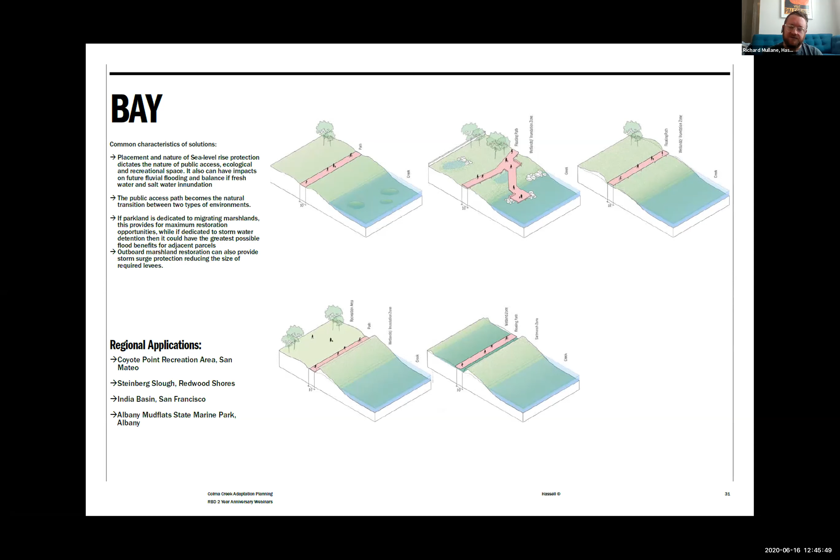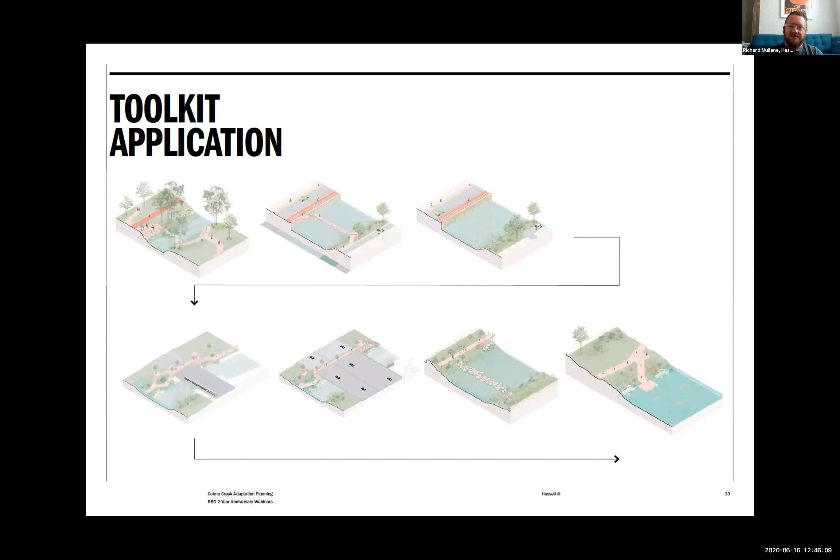Eventually we apply this toolkit in Colma Creek to a number of different scenarios, and we look at each of those different zones, creating this continual access path, as well as transitioning zones of different ecology restoration from the park all the way down to the shoreline.

And we assess 3 key scenarios based on investment and return on that investment, but also based on which additional parties need to be brought in to deliver these different routes. So that's been our process.

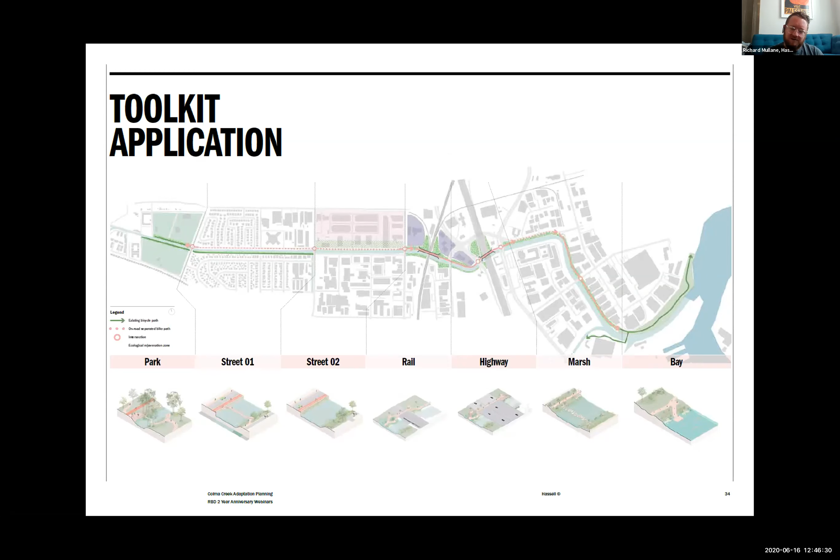So what we did was we actually used the principles diagrams that explained our approach to create a storybook. Christina Lives by a Beautiful Creek, and the idea of the storybook is that it's told from a future perspective from a young girl that has a restored creek as sort of a key part of her daily life in South San Francisco. And we put it online. It's in 4 different languages. We've done a print run of about 200 books that are being distributed around different community groups, the Mothers Group, the Boys and Girls Club.